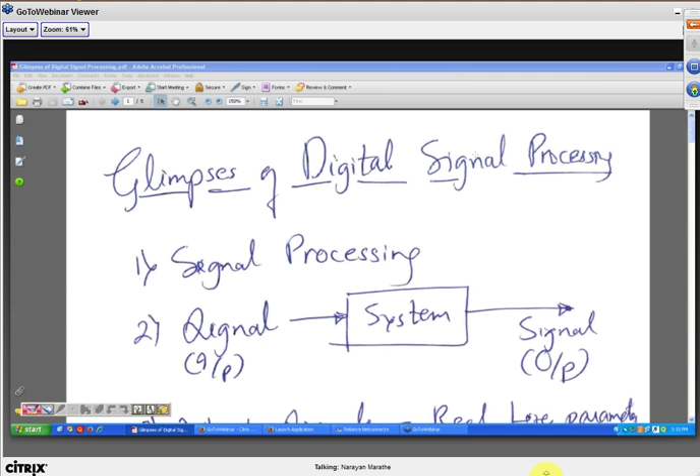However, the purpose is the appropriate understanding of a student. Considering only India as an example, at least 1 lakh plus students undergo this subject every semester, or at least in 1 year. With this spread of education and different backgrounds of students, it is very difficult to teach this subject in a manner that the learner learns.

And if the purpose is not satisfied, then whatever kind of delivery you have, it may be very classical, perfect scientifically, maybe grammatically, but it will not serve any purpose. Therefore, the focus of this entire course is from the pedagogical perspective, wherein we deal with the approach with which this subject should be unfolded.

The interest of a student gets developed based on the beginning sessions of a subject, and if we have beginning sessions in a classical manner, starting with symbols like x, y, then capital X, then x[n], X[k], then tilde, bar, and all these things, the student gets completely out of track.

Therefore, this first session will try to introduce this subject. This is a webinar course in which, more than students, many teachers are also enrolled. They should look at it from the pedagogical perspective, not as if they are being addressed as if they don't know anything. We honor all the participants, but the delivery is addressing a novice undergraduate student having hardly a 10+2 background or first year of engineering.

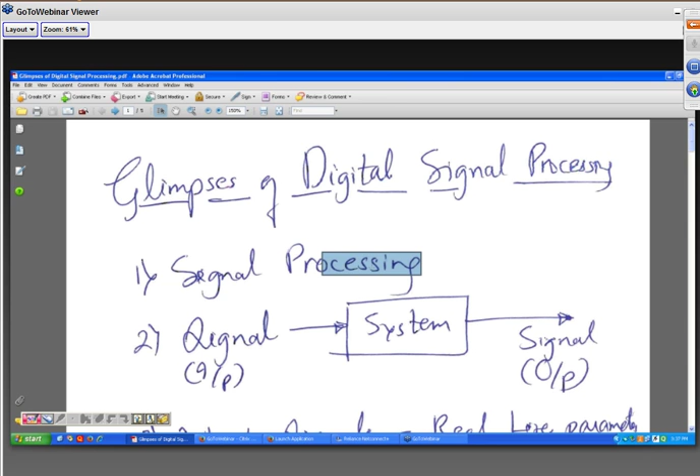Therefore, we have a slow, definite, but well-directed approach in dealing with this entire subject. So we now deal with a signal and its processing. Its processing corresponds to some kind of signal input being applied to a system.

The components of that system are such that the signal applied is able to have some kind of effect on the components in the system, and then from somewhere in the system we are able to get another signal. The first signal is called the input signal. It goes into a system, produces some effects on the system, makes an impact on the system components, and makes the system deliver some other signal, which is the output signal. So input signal, system, and output signal.

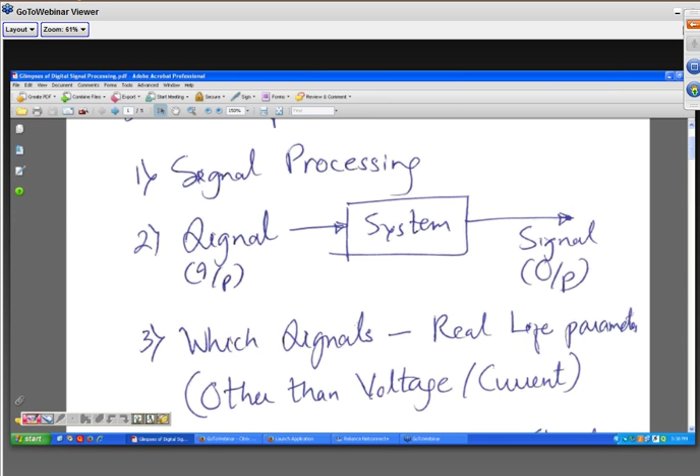That is the phenomenon. Then which signals happen to be more significant? In practice we deal most of the time with voltage and current and electric circuits consisting of R and C, to which we will come after some time. Even though electrical systems are convenient to deal with, and electrical energy can be converted from or into any type of energy and is treated as a central theme, we find that the electrical signal is normally not a real life signal which we encounter.

Therefore, taking an RC circuit, applying some voltage to it, and finding the output from that RC circuit: many of you might have observed that you deal with a circuit like this. You draw a capacitor, you continue on this side and on this side. So this is an input and this is an output. R we can take as 1 ohm, C we can take as 1 farad. Here we apply Vin(t), which is varied, and here we try to obtain Vo(t).

But the major problem is that, however much you may be convinced, the voltage signal is no doubt a proper signal, but I make a very meaningful statement that the voltage signal is not really a real life signal. Voltage signal is not a real life signal. This being the fact, we try to deal with it like this. I am just completing this correction, which is not so important. This is input, and this is output.

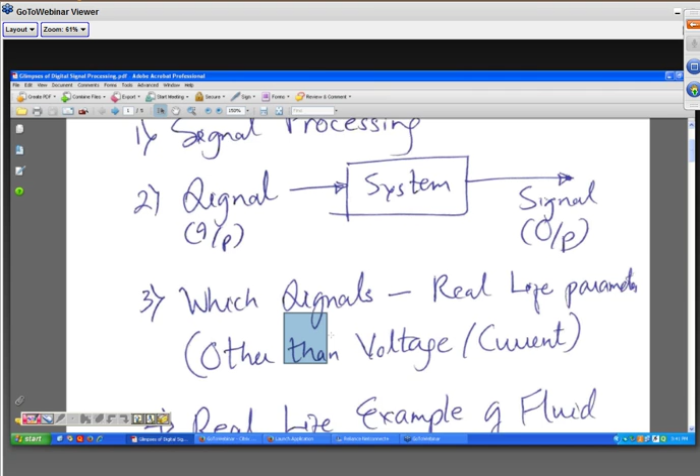Conventionally, the first component in analog systems in the signals and systems part is taken as this, but as I already stated, this is not a real life example, so I will specifically turn to a real life example, even though it is very simple, which everybody can understand. It is from fluid dynamics: a simple water level model. I will explain all the simple assumptions. It is very simple, but the message it conveys to a student is most significant. From simple things, a very significant message should be delivered; if the message is not delivered, the things are of no use.

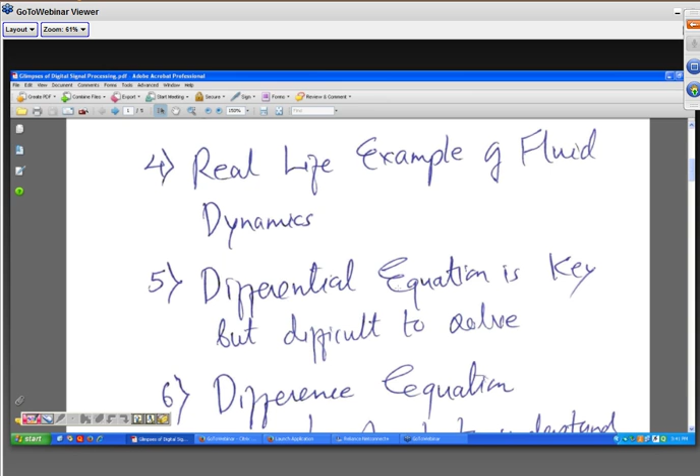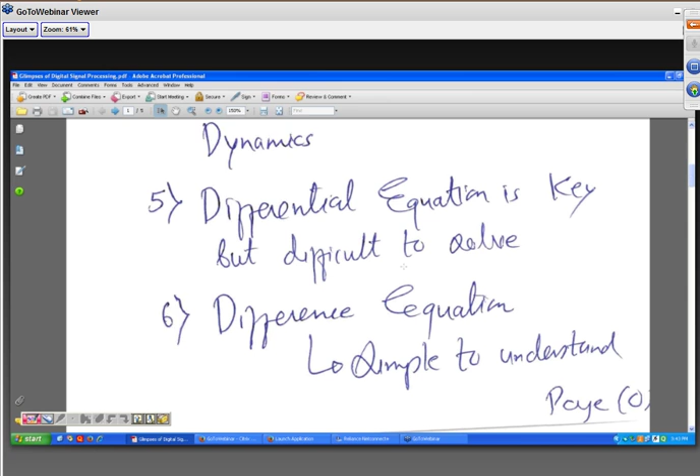Therefore, we will proceed step by step and lead to a differential equation. The differential equation is the key theme in signals and systems, analog first and then its conversion to digital. The differential equation and its solution is a good classical thing with centuries of existence, but it is not considered an easy cake by students. Generations today are luckier than earlier ones, because they have a differential equation and a good tool to solve it, the difference equation, which is very simple to understand. Now this water level model, which I specifically developed, has a few original themes, and we shall proceed with them. So, introduction to systems is a major theme.

Ohm's law is taught even now in high school, and when we teach it, electric voltage is applied to a resistor, and depending upon voltage and resistance, I equals V over R. But I claim again that this leads to a pseudo understanding, because voltage is something which is not perceivable for a student. Therefore, a very nice analogy has been developed with the water level model. You might be looking at one figure here.

Only thing is that I have just forgotten that at the highlighted spot there is a water tap which is continuously feeding the water, so that the water level in the first tank is always maintained as L1, and for the second tank we are having the exit, so the water level there is always maintained as L2.

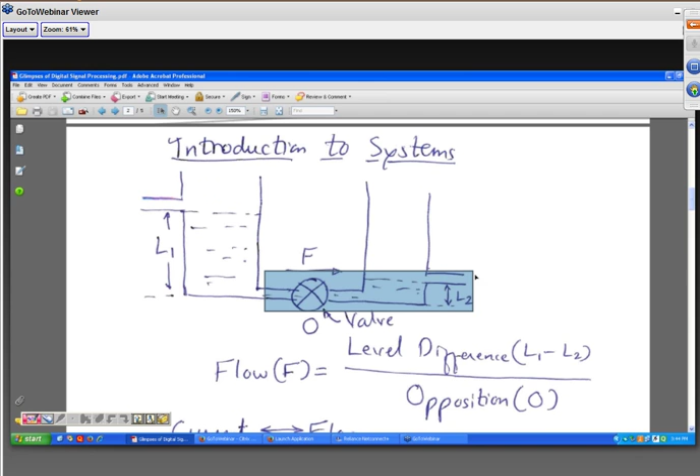So one correction is that at the highlighted place, which is now the box, there is a water tap and water is always flowing there, because in most of these examples you will not find it anywhere. This is just an example to explain Ohm's law. What I want to create now is a first order water level model system in a few minutes from now, but for that the theme is very important.

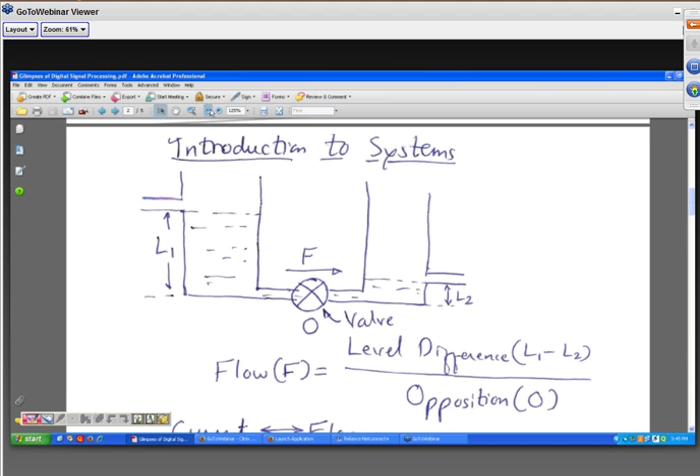Now what we find, it is very clear that we have a water level and electrical engineering analogy, wherein you will find that flow, which is F, is in quantity per time, maybe cubic meters per second in SI units. Flow is equal to, it is very clear, that there is a valve. The valve has the pipe which I'm showing.

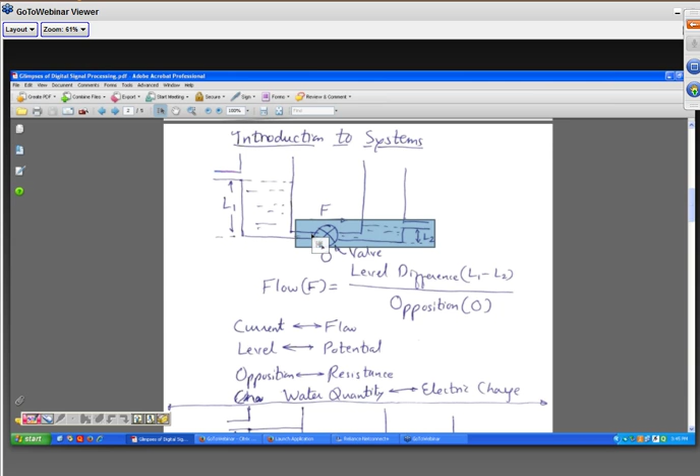The highlighted component here includes one pipe which is flowing up to the valve, and after the valve again there is a pipe. This pipe is presumed to be carrying zero resistance, whereas the valve has an adaptable opening, so a small opening would be large resistance or more opposition, and a large opening would have less opposition. So it is very clear that there is a simple 1:1 correspondence.

I'm extremely sorry, the sequence is reversed: current is the electrical side, flow is the water side; potential is the electrical side, level is the water side; resistance is the electrical side, opposition is the water side.

So just like I is equal to V1 minus V2 upon R, that is, current is equal to potential difference upon resistance, similarly flow is equal to level difference upon opposition, L1 minus L2 upon O. Flow is L1 minus L2 upon O.

And the last point which remains: what is equal to electric charge? The answer is the actual water quantity itself is equal to electric charge, because current is the rate of flow of charge with respect to time. Similarly, flow is the flow of water itself with respect to time.

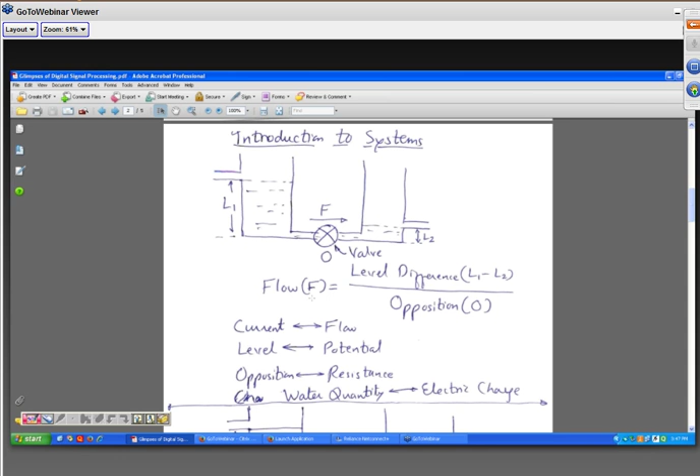Now, this is the most significant model for a valve. A valve is a resistor, and the flow from a valve is proportional to the level difference across the two sides of the valve. So the valve is now modeling my resistor, and now the most significant thing starts, the RC circuit model.

Here again, I am extremely sorry, the water tap is also supposed to be here at the first tank. At the first, no, it is not a tank actually. L in is maintained by the outlet, and in that continuous water is flowing. In the highlighted portion, there is a water tap which is always maintaining L in, and also the platform is a movable platform. It's most important, and this pipe is of flexible length, so that I can move the platform up or down, which will change L in.

And the next is the tank having cross section. It's a cylindrical tank having cross sectional area A, which models a capacitor. This being cylindrical; if it is non-cylindrical, it will lead to further complexity. I am not coming to that right now, but I will come at a later stage. Now what will happen? The level of the water in the tank is called L out.

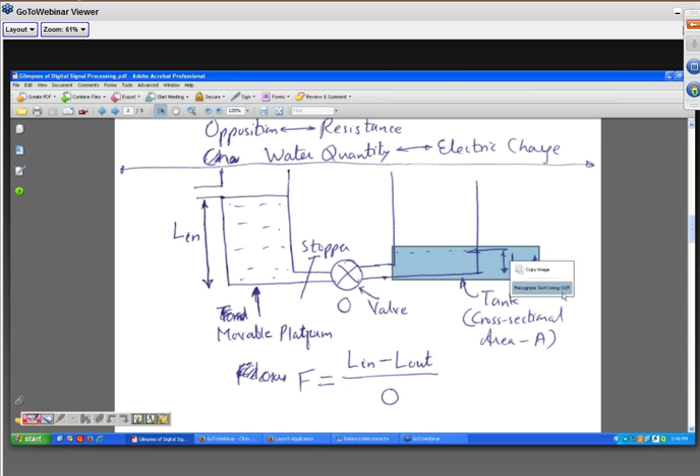This is the base level. Base level is very clearly shown. The base level, I am just plotting the line. Presently the valve is at base level; the same horizontal level of the valve is base level. The movable platform can change the level so that L in can change as a function of time.

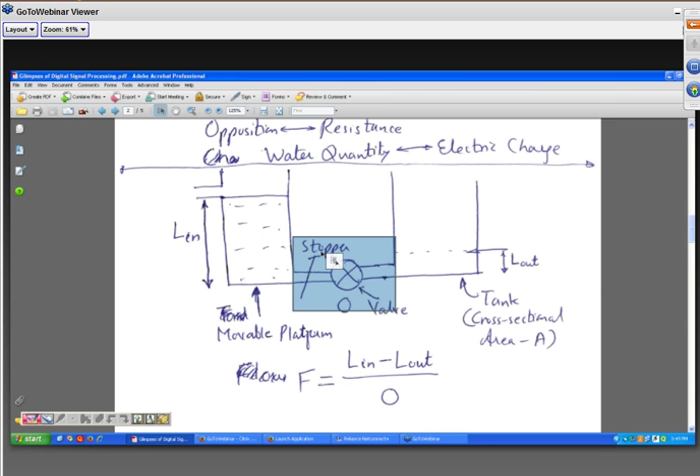Initially, in the highlighted portion, there is a stopper shown. That stopper is just like a disconnect, just like a switch in my RC circuit. When I open the stopper, things start, and once it is open, things will change. The valve has an opposition O, just like resistance R, and the capacity depends upon the area.

So now I again say that we should try to derive an equation which governs the relationship between L out and L in, and actually L out and L in are functions of time.

So even right now in the first formula, what you are observing is flow F is equal to L in with respect to the valve. The valve is a resistor, so the first potential is the level before the valve, and the other is the level after the valve.

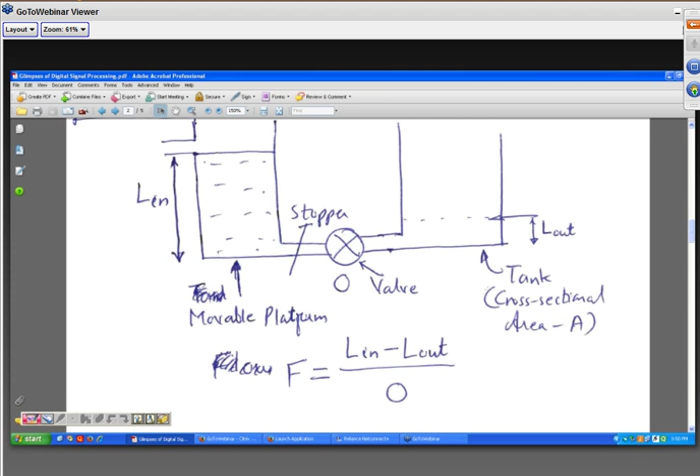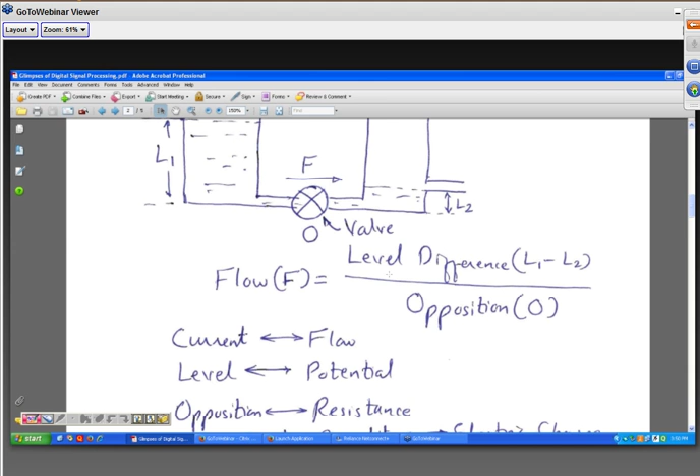Level before the valve is L in, level after the valve is L out. So L in minus L out upon opposition O. I hope that the idea is very clear, that for a valve, the flow allowed by a valve is level difference upon opposition. Therefore, we can find that the flow here is L in minus L out upon O.

Just I move ahead, and now I say that since these are functions of time, I make them bracketed with t. So f(t) is equal to L in(t) minus L out(t) upon O. It is presumed, and it is quite obvious, that the valve is having constant resistance. It doesn't change with time. It is a reasonable presumption. Now a very interesting circuit theme will develop.

What will happen? Suppose initially there is no water in the tank, the stopper is closed. If we have put the movable platform such that the L in is 1, and if I open the stopper, what will happen? Any novice can also say that the moment the stopper is opened, the water will start flowing. The water starting flowing is the cause. But what is the effect of that? The water will start flowing from the left source, and will now move to the right tank.

Why will it move from left to right? Because initially the level on the left hand side of the valve, which is L in, is say 1 meter, and one more important thing is that L in is maintained constant, because I had forgotten that here there is a tap which is continuously supplying the water. So the water in the left source is always maintained at the position shown, and as it is always maintained at the position shown, it will maintain.

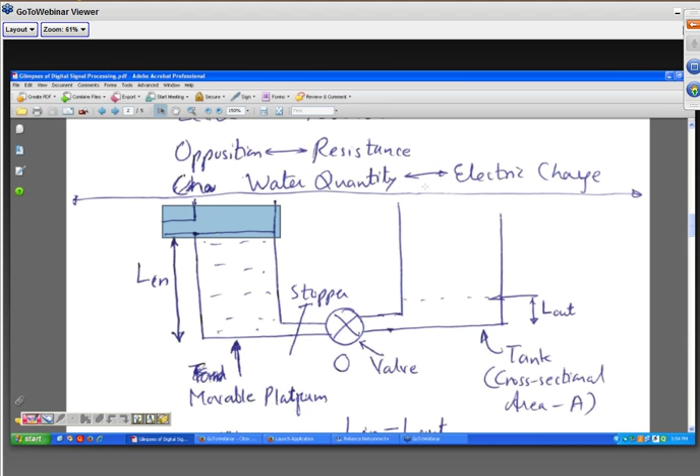But the effect is now increasing the level in the tank, that is the right hand side level, and it will now have an impact on the cause. The cause is leading the effect, and now the effect is changing the cause. How? In what manner? As the level in the tank rises, the level difference will reduce, and as level difference reduces, as per my earlier formula, level difference upon O, O being fixed, the flow will reduce. So the flow which was there when I opened the stopper will not be maintained, and that flow will reduce.

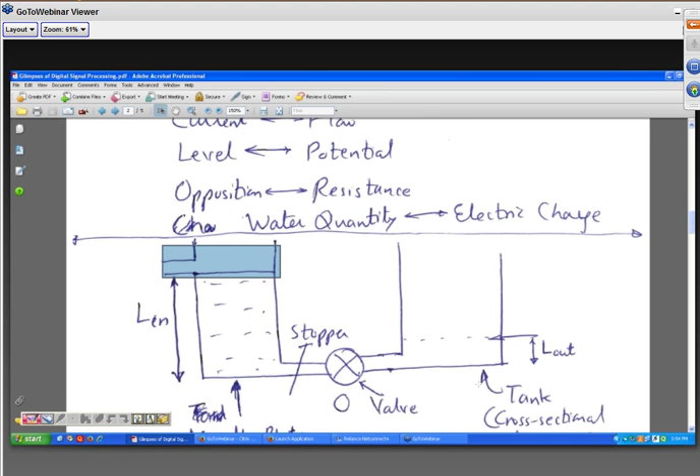But the flow direction will remain the same. As the flow is reduced, the flow reduction will also reduce the quantity which is being put into the tank at a certain rate. That will also reduce the rate of rising of the level of the tank. The rate will be reduced, but the level will increase. Level will always increase. Level of the tank increasing will again further reduce the level difference, which will further reduce the flow.

So the common sense non-mathematical conclusion is that the flow which started at the opening of the stopper will continuously reduce, and the level will continuously increase in the right hand side tank, but the rate at which level increases will always reduce. So the level of the tank will increase at an always reducing rate.

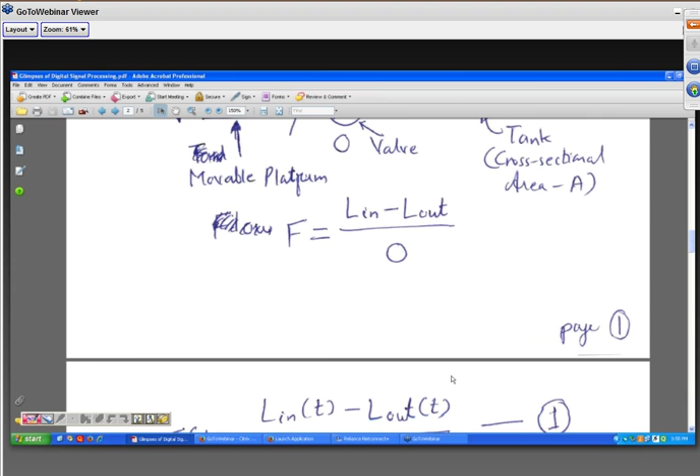Now we will start to put it mathematically. Now, how do we relate the water quantity in the tank and the flow and the area? Water in the tank is area into level, that is L out. Why? Because it is a cylindrical tank whose cross-sectional area remains the same throughout the height. For non-cylindrical tanks, or those whose cross-sectional area is a function of height, we will deal with them separately.

Right now, water in the tank is area into level. So at a particular time there was some level, meaning there was some water. After some time, if water is added, for a given water quantity there was some level. When we add the water, the level will rise.

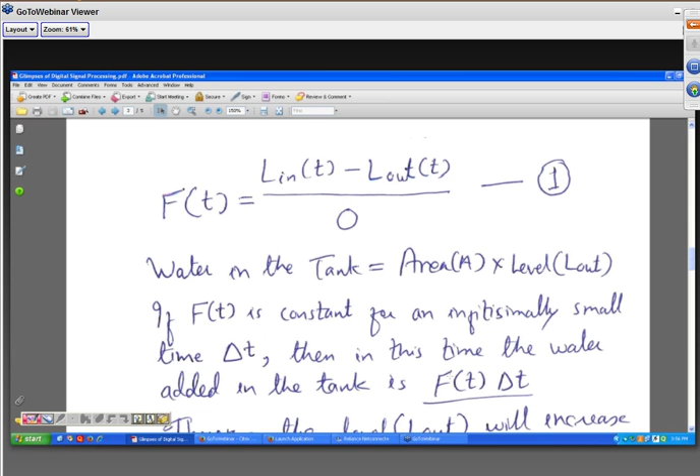Now I am making a few statements which may be prima facie. In the system, when I open the tap, the stopper, initially the left hand side source was at level 1, the right hand side tank was having level 0. I open the stopper, the water will start flowing, but the flow is always reducing, so the water flow will never be constant. Why will it not be constant? Because the flow starts, level increases, flow reduces, but level again increases.

How much water is added into the tank? In that case, the answer would be flow into time, but unfortunately, since flow is not constant, you cannot apply flow into time.

Therefore, it has to be integration, but again, that integration is something somewhat clumsy, which creates some phobia, some inhibition for the student. Therefore, I will not jump to that right now.

What I will presume is that the flow is changing, but not abruptly. Therefore, if I presume that delta T is infinitesimally small, for water systems, some millisecond is a negligibly small interval. Delta T is, say, 1 millisecond, for example, not necessarily. It is always a small, infinitesimally small time interval.

So in that, we can presume that F(t) is piecewise constant. It is not constant, I am not contradicting that. I am agreeing that it is varying, but the variation for that particular small interval is in an ignorable range.

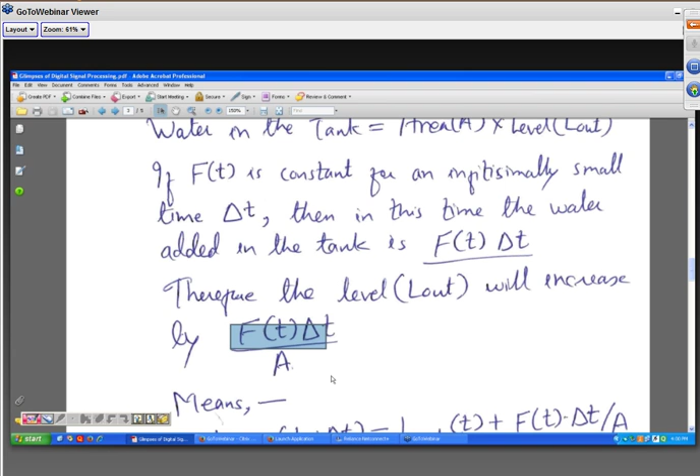Therefore, we can easily say that if F(t) delta T is the water quantity added, then the water level will increase by an amount F(t) delta T upon A. And so we can have a very simple equation.

If you concentrate on this equation: if L_out(t) was the level at time t, then at time t plus delta t, L_out(t plus delta t) would be L_out(t), meaning the water level is going to increase. So at time t plus delta t, the water level would be whatever was the level at time t, plus the level increase during time delta t, and we have seen that the quantity increase is F(t) delta t, therefore the level increase is F(t) delta t upon A.

And now by simple mathematics, the equation can be rearranged such that F(t) is equal to A into L_out. You can look at this equation: F(t) is equal to A into [L_out(t plus delta t) minus L_out(t)] upon delta t.

Now, this is a very significant equation. What delta t are we supposed to presume? Delta t is supposed to be infinitesimally small as possible, and it should tend to 0.

And therefore, by the first principle, if we ignore A from this equation, the remaining part, f(x plus delta x) minus f(x) upon delta x, is equal to the derivative. So we find that it is L_out, which is a function of time: L_out(t plus delta t). Instead of f, it is L_out; instead of x, it is t; instead of delta x, it is delta t. So we find that it is the derivative of L_out, the time derivative of L_out.

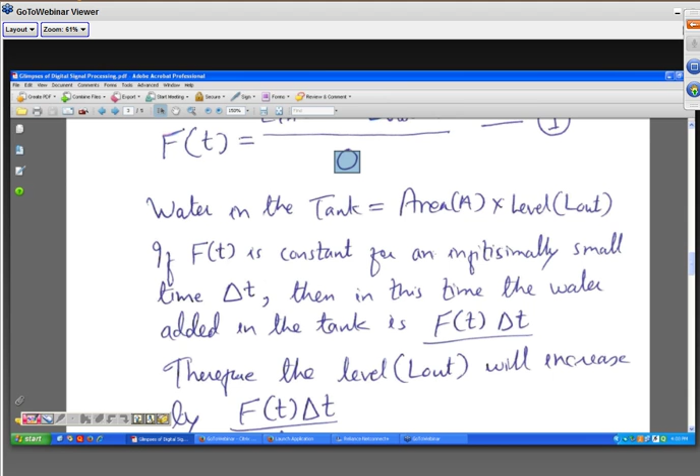So the valve wants flow to be in a particular manner. It should be L in(t) minus L out(t) upon O. The valve wants the flow in some particular manner, while the tank wants flow in some other manner, and this is a series circuit—a connection where there is no outlet in between the valve and the tank.

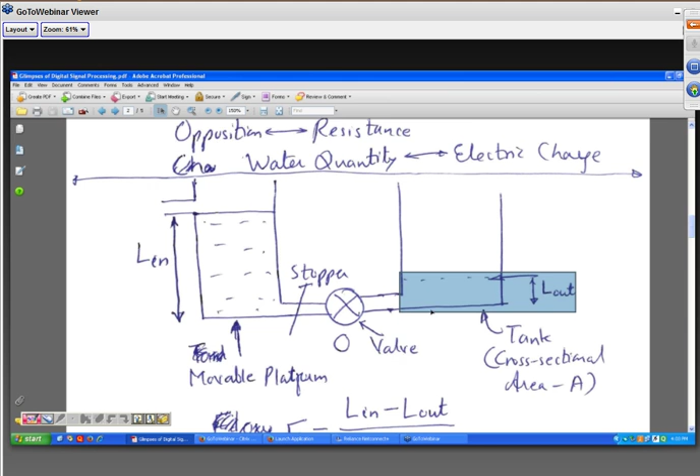Therefore, what is obvious is that for a series circuit, as the current is constant, likewise equation number 1 is dictated by the valve—it is conditioned by the valve characteristic. Equation number 2 is imposed by the tank characteristic. Since it is a series circuit, the flow imposed by the valve must be the flow imposed by the tank. They must be one and the same, and therefore dL out(t)/dt equals L in(t) minus L out(t) upon O, into A.

This is now a classic linear differential equation. But what problem occurs is that O into A is a term which is some constant—it is like an RC product. On the electrical equivalent side, O corresponds to R. Large O means large R, and large capacitor means a tank with large area. So A represents C and O represents R.

But we try to further simplify, and further simplification is by the phenomenon that if we have the option to choose, at the beginning we should choose a simple value, using O and A such that the product OA is equal to 1. If so, the equation is further reduced to a very nice looking linear differential equation: dL out(t)/dt plus L out(t) equals L in(t).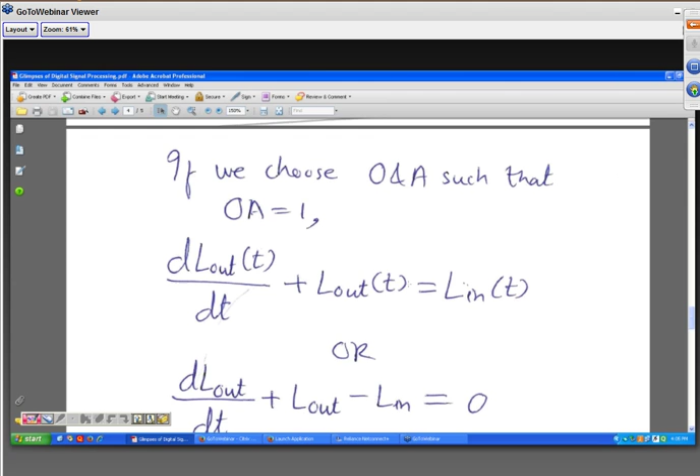The bracketed t is presumed, so I am not writing it specifically, and rearranging in classical form: dL out/dt plus L out minus L in equals 0. This is the differential equation.

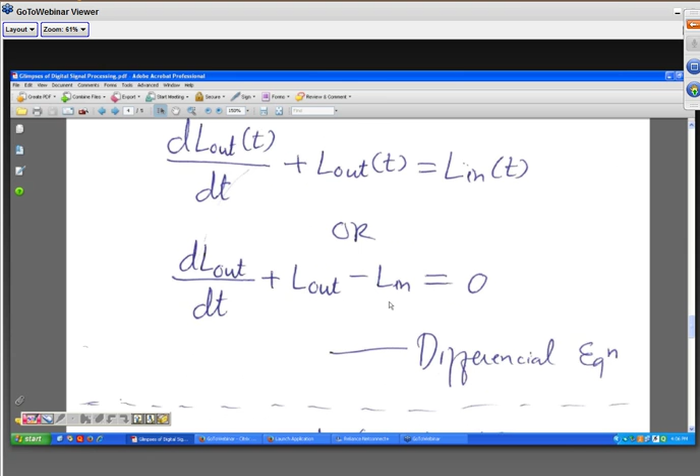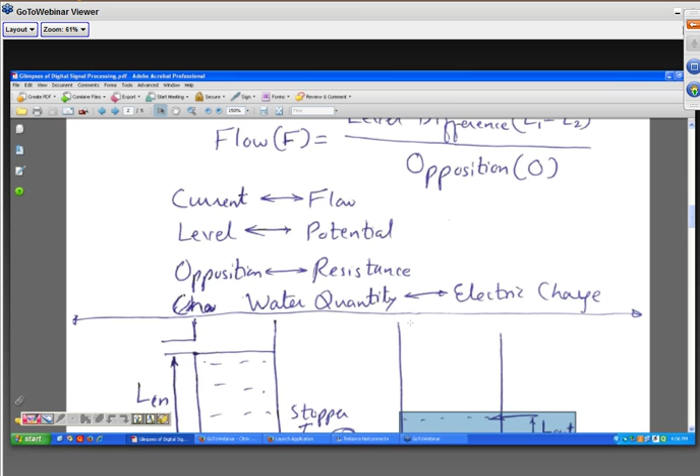And now this differential equation is universal for this entire tank model. Mean to say, at the beginning I said that the tank should be empty, the stopper should be closed, and I open the top stopper at t equal to 0, and after that the system begins. But once we presume that the stopper has been opened at some time and the system is in some state right now, then what can we further have?

We can further have a liberty. This is a movable platform. You can move it as per your desire—put it on some mechanical arrangement and move it up and down, in a linear manner as a triangular wave, abruptly as a square wave, in simple harmonic motion as a sinusoidal waveform, and so on, or you can hold it in your hand and move it randomly.

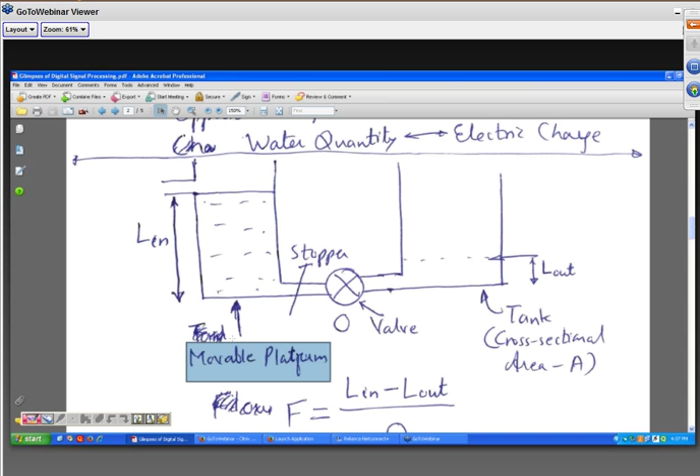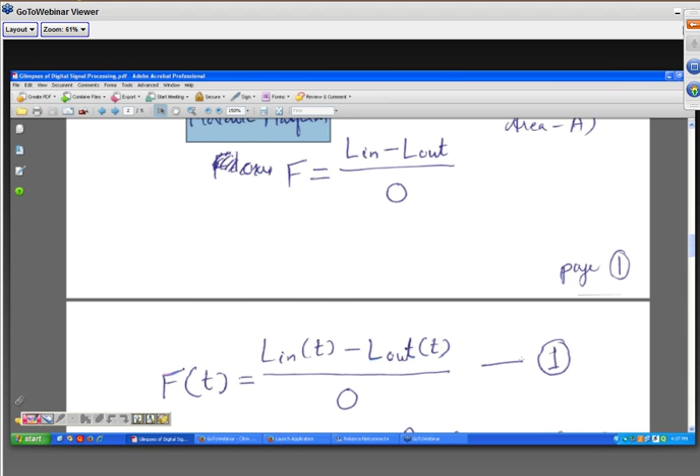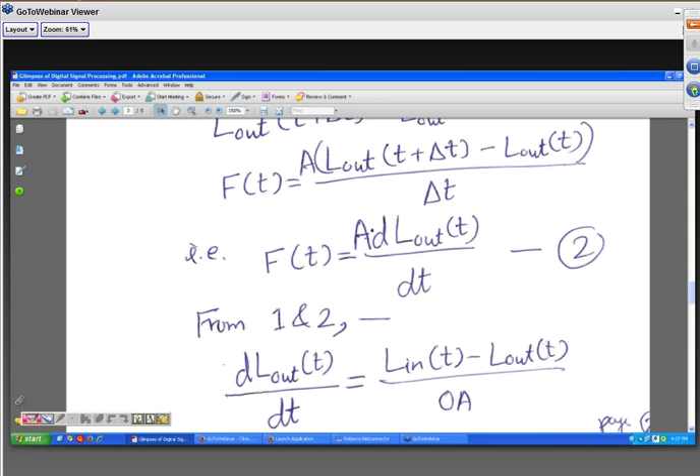And for all these kinds, you need to forget the stopper. The tank being initially empty, you need to forget that too. The differential equation which we have derived—because neither equation number 1 nor equation number 2 have a precondition of the stopper, or the initial state of the tank, or anything like that—therefore the final differential equation, dL out/dt plus L out minus L in, is a universal differential equation for my system.

And I hope that while constructing this differential equation, we did not require any preliminary knowledge. The fluid dynamics is very easy to understand. The only presumption is that the flow is linearly proportional to level difference, which may not be exactly correct, but is a very reasonable presumption, and is inversely proportional to some opposition. The opposition O may not be linearly proportional to exact opening, but we can define some opposition, some level difference, and conveniently presume that level upon opposition is flow. Based on that single presumption, we have got this differential equation.

The solution of this linear differential equation in itself is also not so easy. What happens is that the classical solutions are learned by a student in a different context without matching them to actual application, and then the things again lead to some kind of confusion or chaos. So to this I will come in the next session, but right now...

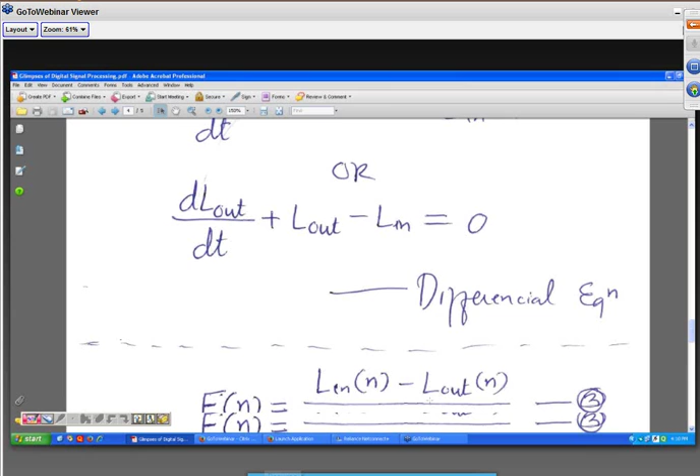Or what is called as sampling. Means what? Again, that sampling theorem, why twice sampling is sufficient and all that - if it is taught at the beginning, then it may not give a good impact. What we can think is, instead of continuously watching the levels, which I even cannot watch, what we can think of is...

Nowadays every student carries the mobile, and now what is the good example of sampling that I am saying now? We have actual system, the water flow is there - there is a left hand source, there is a middle valve. I hope that the picture is not before you, but the picture is on your intellectual plane. There is right hand tank and the system is flowing, and I am having a movable platform and I am moving left hand source. Then there are two options.

You yourself watch the entire thing - what is L in at every instant, what is L out at every instant, and what is flow at every instant. The flow you cannot perceive to that extent, but ultimately we don't want flow also, because the final equation I'm interested in is for what kind of opening and for what kind of tank, what would be the impact of L in and L out. I want to study the interrelationship between output level and input level, in what manner the output level changes for what kind of input level for a given system. Given system means given opening and given cross-sectional area. So flow becomes redundant - not redundant, means right now I don't need that.

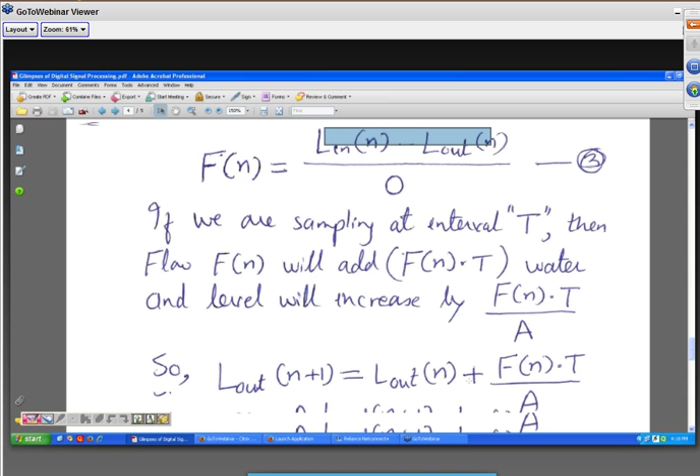So what will happen? L out. What now? You concentrate on this equation which is highlighted. Let us wait for some time. It is yet to come. This being an audio webinar, you may not be able to see it. And now you are observing the highlighted equation.

You can observe that L_out(n) was the output level in the nth snapshot. L_out(n+1) would be the output level in the n plus first snapshot. And by what amount will they differ? L out will increase from the nth snapshot to the n plus first snapshot by the water quantity added upon area. That is, L_out(n+1) = L_out(n) + Fn·T / A.

That means now, you look at this equation number 4, Fn is equal to A into, there is one mistake. What is that mistake? There should be a bracket after the dot: A·(L_out(n+1) − L_out(n)) / T. I am sorry for that.

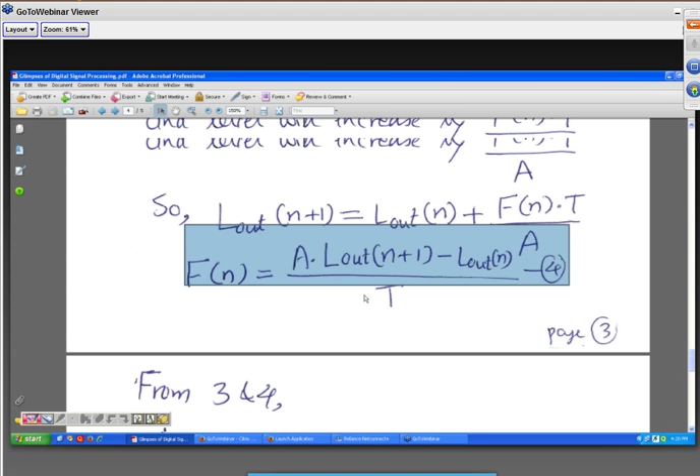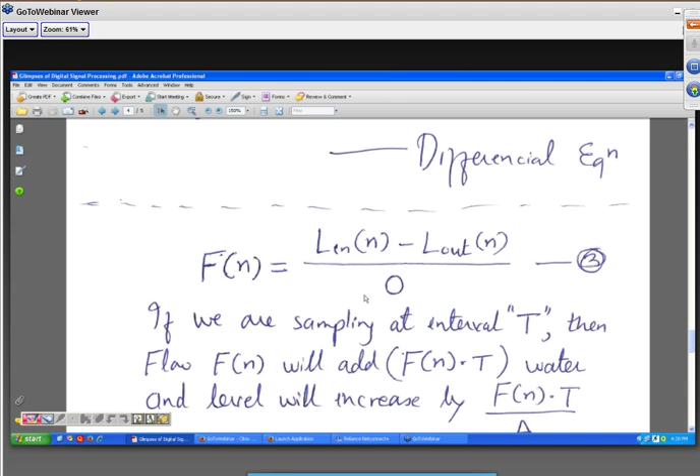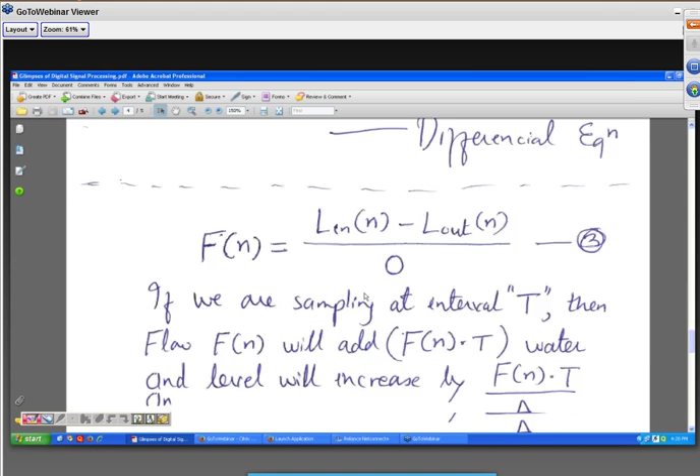Now if you look at equation 4 and equation 3, it is just taking some time, you will find that the flow must be the same. Therefore Fn will go out of the picture and I will get an equation in terms of level only. So from 3 and 4 you come to the highlighted equation. Now you must be able to see the equation, that is L_out(n+1) − L_out(n) = T/(O·A) · (L_in(n) − L_out(n)).

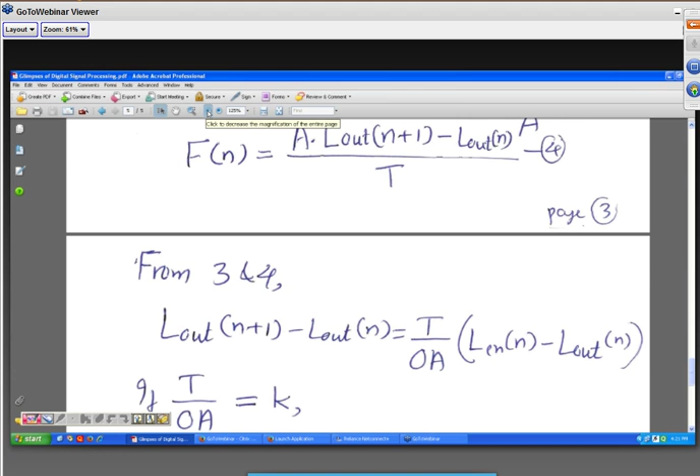That's all. So you can just look at it, I will just make it small. So this Fn you are substituting in the previous equation, and by that you get the equation for L out. So now, the most simple thing is that everything is in my understanding domain, because L out is a snapshot, L in is also a snapshot. In the moving picture I can see the levels distinctly. I can write a very nice difference equation.

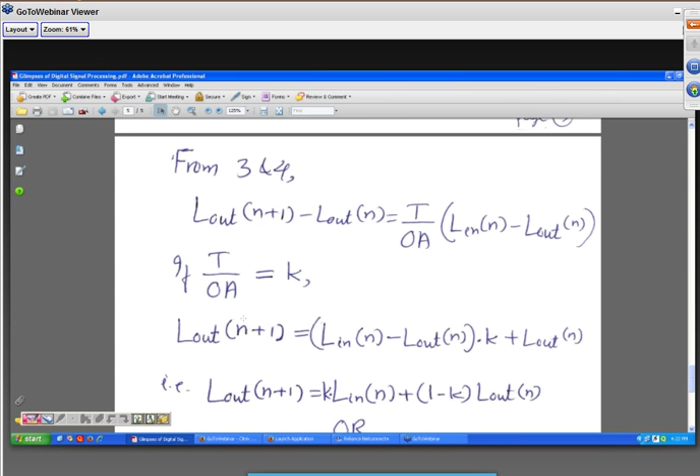So now I see here, this is a classical difference equation. It is actually the equation of an IIR system. To that I will come slowly. So here again, T is something which I am sampling, O and A are again some constants. Now if the entire term T/(O·A) is some constant K, my equation is further reduced like this. It is just numerical rearrangement. L_out(n+1) = K·(L_in(n) − L_out(n)) + L_out(n).

Wherein it is again very easy. What I mean to say is L_out(n+1), that is the output at the next snapshot, it is a common sense equation. In general it is always my approach to get rid of a cascading effect.

For a student who joins late, for a student who doesn't understand something, irrespective of that, even if you look at the highlighted equation, it is very clear. A common man can say that L out n plus 1 is, you look at the second term of the right-hand equation, L out n plus something, and what is that plus something? That plus something is proportional to flow, and the flow is proportional to L in minus L out.

So irrespective of any of the previous discussion, this highlighted equation can be easily understood: the level at the next snapshot of the output is the level at the previous snapshot plus level added by some amount. And level is added by what amount? Level is added by something proportional to flow. And flow is what? Flow is something proportional to level difference. And what is level difference? Level difference is the level of input at nth snapshot minus level of output at nth snapshot. So it's a classic equation.

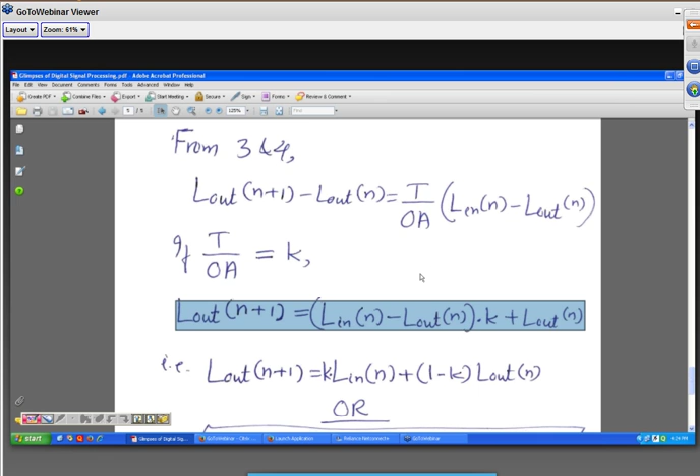And again, by rearranging the terms, I just multiply the terms, L out n plus 1 is equal to K into L in n plus 1 minus K into L out n. And in general, n plus 1 I have taken, but normally we don't take. So you can substitute n plus 1 by m, so n will be m minus 1, and again substitute m by n. In general, instead of n plus 1, if you choose n, then n will become n minus 1, because in classical terms, which usually nobody understands, it is a time invariant system.

So L out n is A into L in n minus 1 plus B into L out n minus 1, which is now in classical terms Y[n] is equal to A into X[n minus 1] plus B into Y[n minus 1]. The one change I made is that the bracket is made a square bracket, which is generally done in discrete time systems. So the current output is a linear combination of past outputs and past inputs. Here there is no current input, but there is past input.

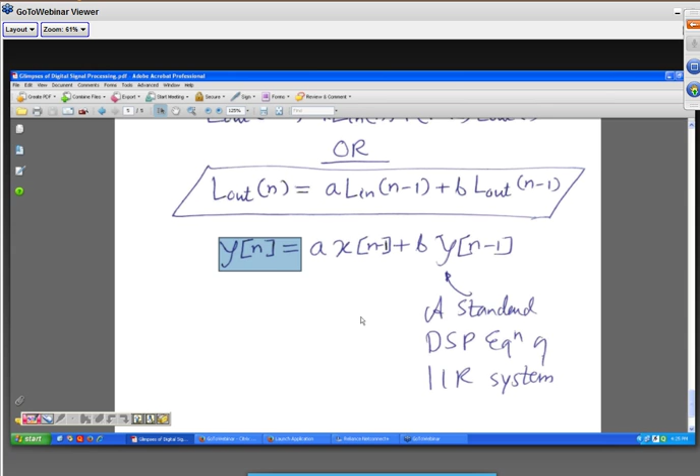Now I want to draw your attention to this complete highlighted equation. You can see the current output is a linear combination of a past input and a past output. A is constant, B is constant. So it's a linear combination of one previous input and one past output.

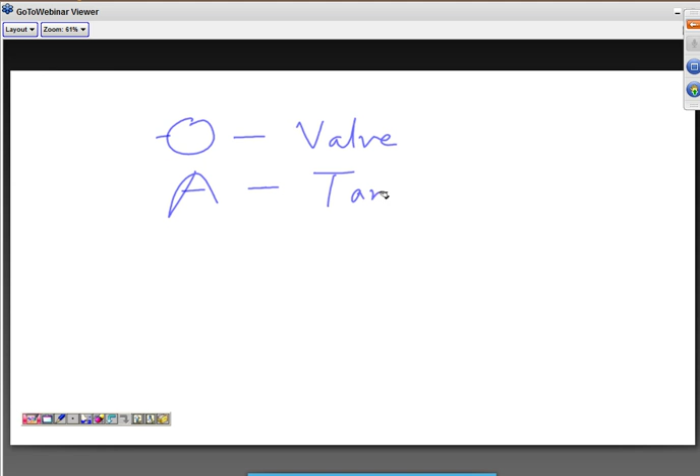This is a standard IIR DSP equation. Now the question would be, what did you achieve, for what purpose was this entire discussion? For a given position O, that is a given valve, and a given A, that is the given tank, I was able to get Y[n], the output level, instead of L out and L in, which is no doubt good, but sometimes we are so prejudiced about symbols that we feel this is better.

Plus B into Y[n minus 1]. To be precise, this is x[n minus 1]. This equation which I have derived is for simple understanding. When computing, I had not gone into those details, but taking the flow as constant is not actually correct. The flow F[n] between the nth snapshot and the n plus first snapshot depends on the levels at n and at n plus 1, because it is an average.

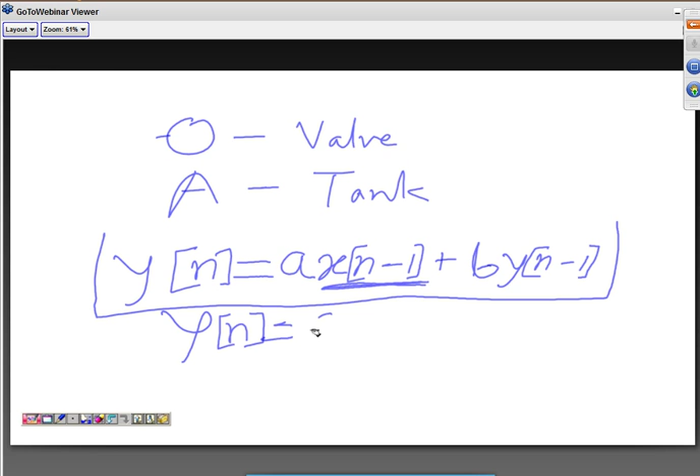And when I am considering the average, I can also introduce some concept of the input at n plus first. Therefore, whether it should be x[n minus 1], or I can choose some other constant a1 into x[n], I can also write that y[n] is equal to a1 into x[n] plus b1 into y[n minus 1], which looks like a more appropriate IIR system. In fact, this is also an IIR system, but one feels that the output y[n] not having any dependence on x[n] is not so classical. This discussion is not of beginning level, so beginners may not understand, but I can also write this in approximate terms.

Yn is equal to a1 xn plus b1 yn minus 1. Current output is a linear combination of current input, past input is not there, and past output. Or if somebody is more interested, then I can also say, whether it is exactly correct or not is not the question. Anyway, we are writing a very approximate equation.

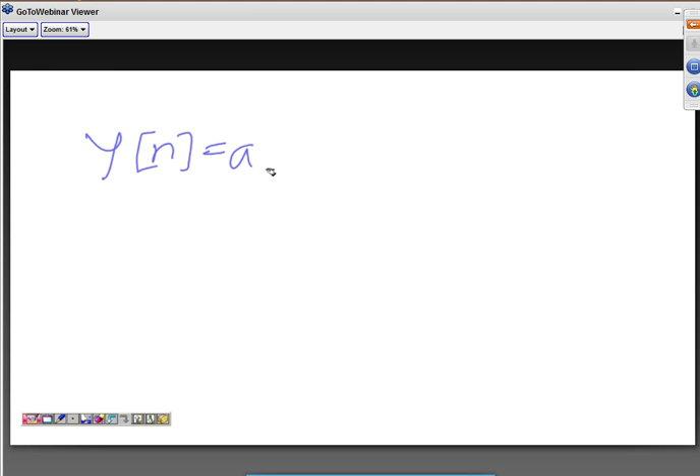Yn I can also say is a0 xn plus a1 xn minus 1 plus b1 yn minus 1; we can also model it very clearly. Now what happens? It is xn, that is current input, one past input and one past output.

So with this we are able to develop an equation, whether you choose this or this; you can choose either. So what do we mean by these equations? We mean that for a given system, for given O and A, I can find out a and b, where X is the input change and Y is the output change.

So if I know the opening of the valve and the area of the tank, I can find a and b. How exactly to find them, we may take up as some exercise. I can write an equation now wherein X can change in any manner. Now I will again switch to my previous one.

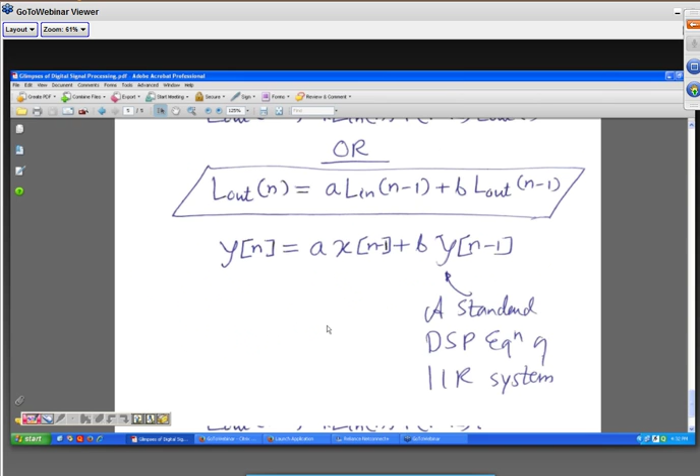I'm just concluding. This movable platform you can move as per your desire, either by hand or by some mechanical arrangement, so that you can completely capture the input changes. You can capture output changes. You can derive small a and small b for given opening O and A. And what is our aim? For a given system, what is the relationship to an input?

And at the end, we find that we have been successful in finding out, ultimately, the relationship: for a given system, I can find out the output based on the input.

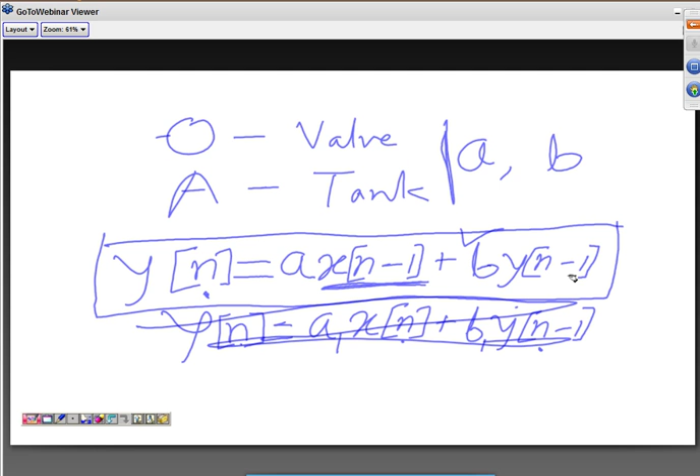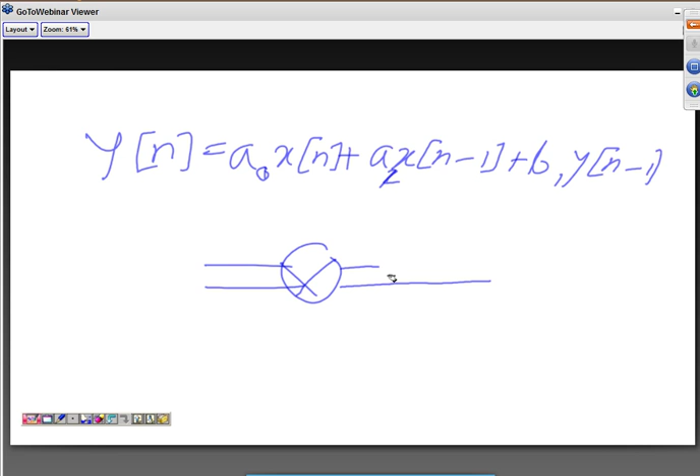Now, I will conclude with some exercise for you. Everything else remains the same up to the valve. On the left hand side of the valve, everything is same. And on the right hand side of the valve, if I take the tank to be a conical tank,

developing the differential equation or the difference equation for this given system itself is a challenge. That is because now the quantity is no longer level into area. The quantity added into this tank will increase the level not by a fixed amount, but it will depend upon the previous level at which we started filling; the constant quantity will increase the level by different amounts.